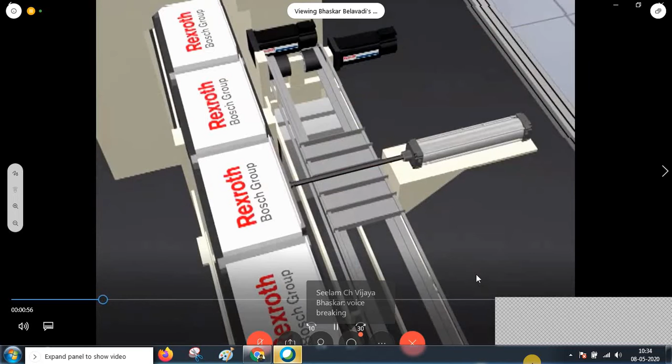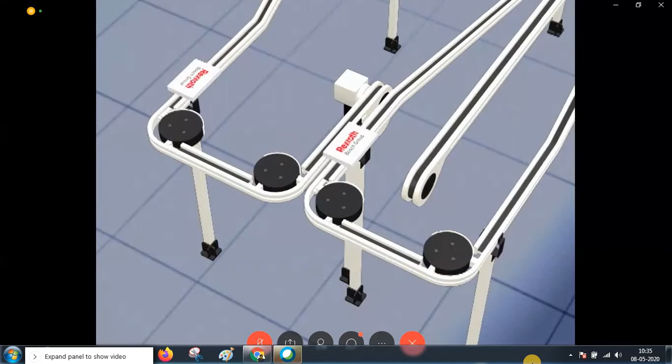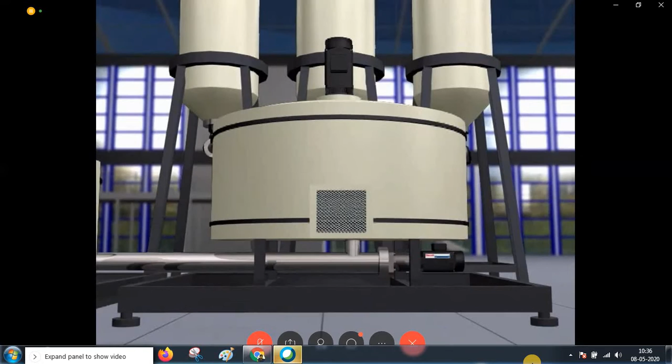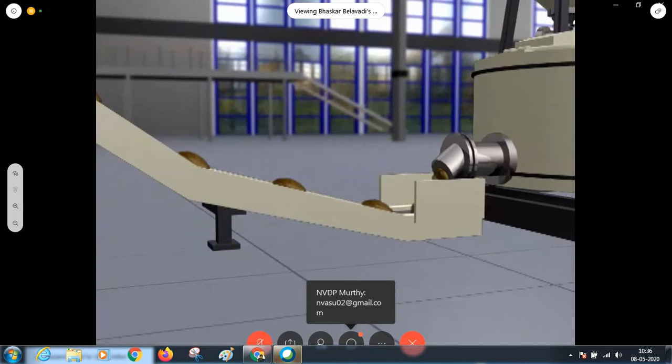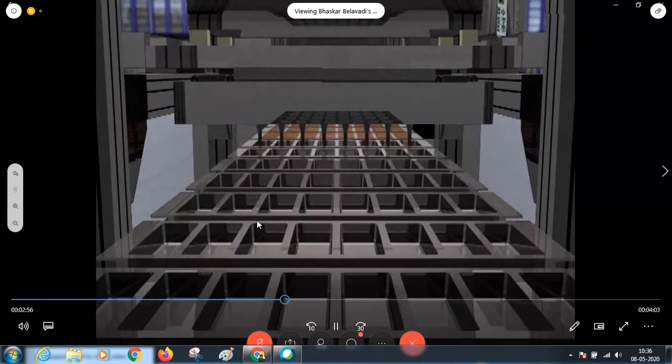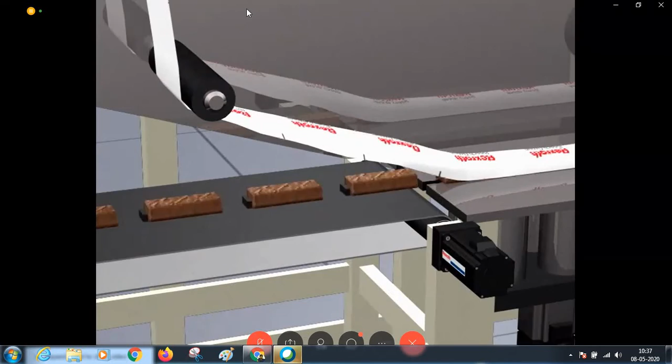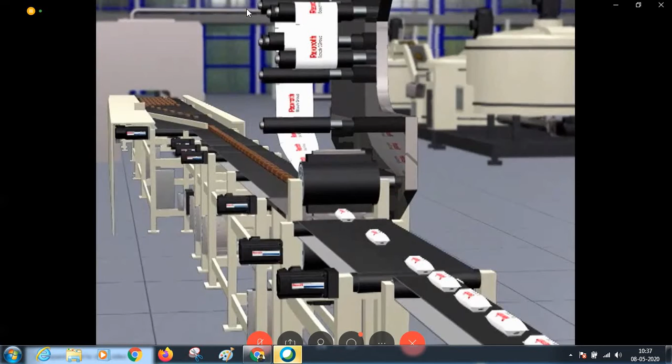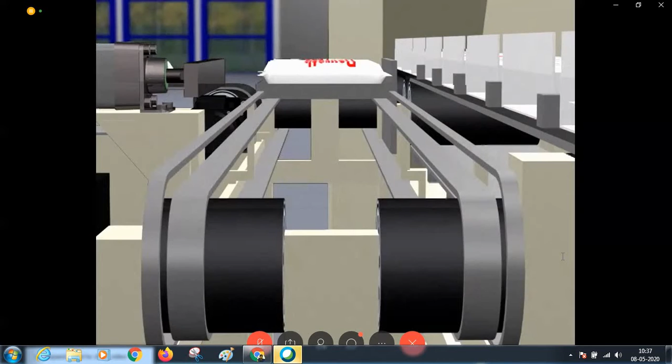Innovative automation concepts with digital servo drives, corrosion-resistant pneumatic cylinders and valves, as well as hygiene-compatible linear modules, ensure high-precision chocolate molding. All conveyor tasks related to the packaging process are mastered perfectly by the modular Rexroth chain conveyor system, suitable for both horizontal and vertical product transport.

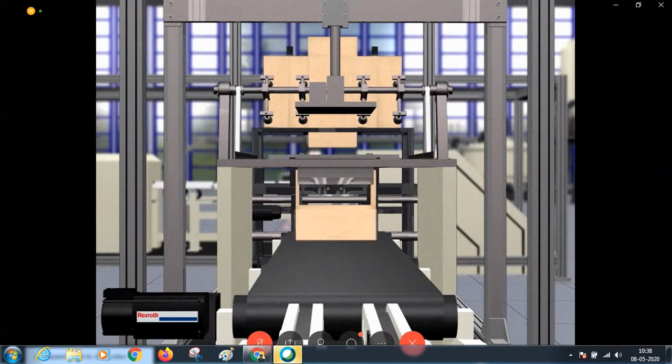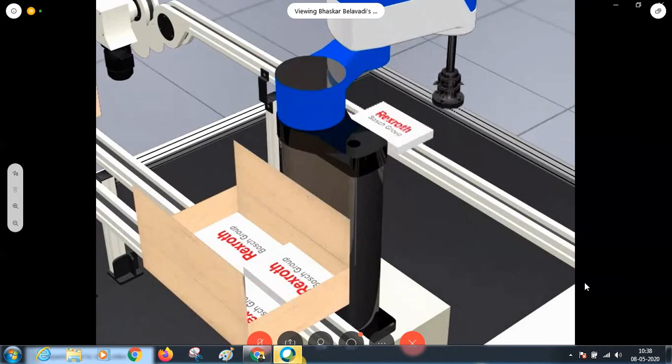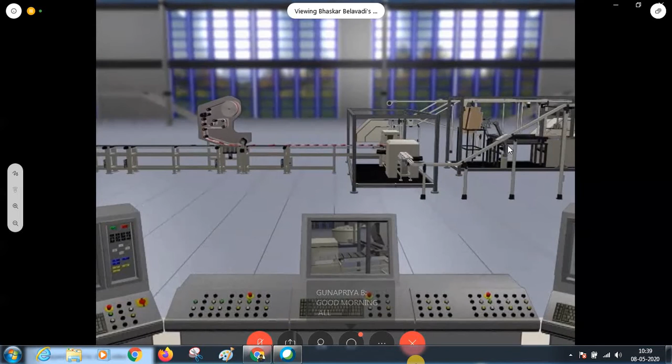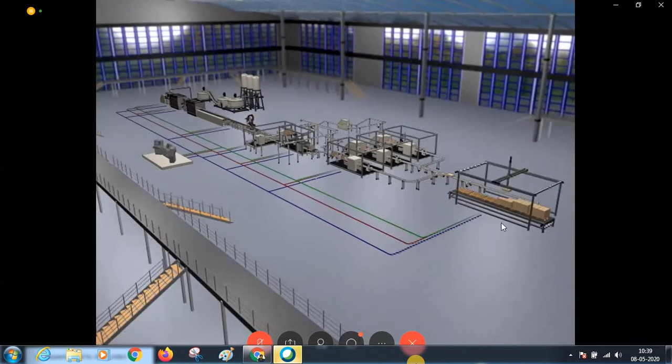While pneumatic grippers make sure that the blanks of cartons are handled carefully, the intelligent servo drive technology and ready-to-install linear motion systems erect the cartons. Networking the systems using Ethernet provides you with central access to all production technology relevant data. Rexroth, competence in total line automation. Now, I can enjoy the chocolate.

Okay, that was a small video, about 6 to 8 minutes, on automation. It was basically concentrating on the chocolate manufacturing and packaging industry. So I think you got some feel about how industries deal with automation, and why automation is really required in industries.

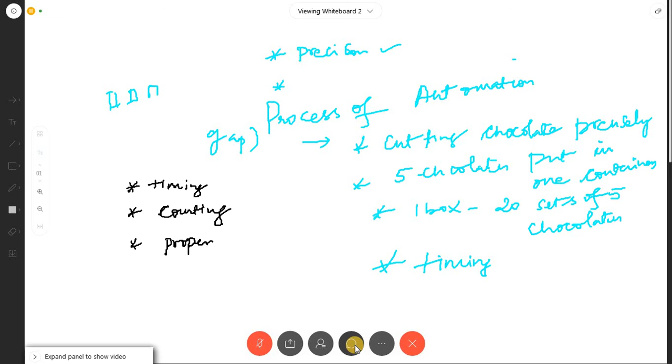So in a simple way, I can just say you would be interested in timing, you would be interested in counting, and you would be interested in keeping all these things intact, like a proper control of the entire process. So all these things we are basically supposed to do in the process of automating any production unit.

So now the thing is getting to know what an automation involves. Timing is required, counting is required. The entire process needs to be controlled in the right way. So a lot of logic is involved in doing all these things. So having said all these things, now I think we need to get into the actual automation.

Now we need to get into the actual automation, where we will understand how automation is really achieved. So to get to know how the industries were operating earlier, I would like to show you one more small presentation where you will get to know how it was earlier and how it is now.

Are you guys able to see this?

So now the concept of PLC has come into the picture. The PLC is basically a kind of computer, I can say, which controls industrial machines and processes. And PLCs are applied in different areas of industry, like material handling, packaging, palletizing, milling, boring, grinding, filling, sorting. You take any kind of operation that happens in industry, everywhere this PLC is used.

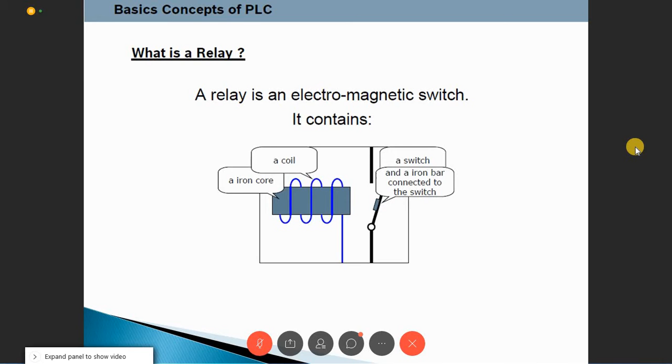With logical relays. Now, what is a relay? A relay is basically a combination of a coil and a contact. All of us know how it works. Now, what you can observe on this side, the one shaded in blue, is basically the relay, where you have a coil and a switch. When the coil gets energized, the switch closes and the current will flow. That is how a simple electromagnetic switch or relay works.

So this is depicting how a relay works. Whenever a coil gets energized, a magnetic field is produced, and the contact will be pulled towards it. You can see that the contact makes, and the current will flow in the contact as well. So the entire PLC, the programmable logic controller, is based on this concept of relay. What a PLC involves is basically relays, nothing else. And it is just a simple I/O box.

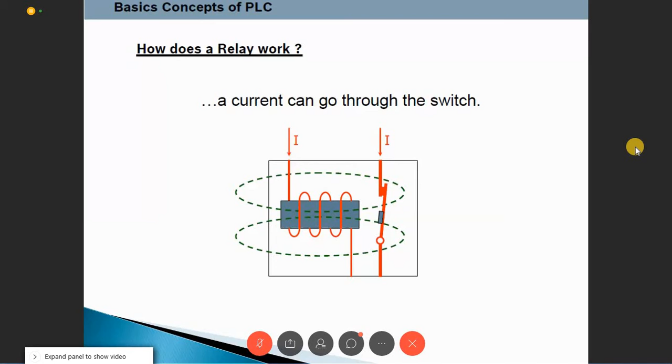So between the input and output, what it has got is a number of switches in it. Okay. So I think this much is enough for us to understand what is a programmable logic controller. So in simple words, to make you understand what is a PLC, I can just say it is just a small box which contains logical relays. You do not have a physical relay, and that makes a difference.

So when I say there are thousands and thousands of physical relays, if at all anything goes wrong in between, maintaining them becomes a difficulty. So in case of PLC, what we have is all kinds of logical relays. You physically don't see a relay, but you say that there is a relay inside it. And lakhs of relays we are able to realize using a programmable logic controller.

The name itself says it. The controller is basically logical in nature, and you write a program to control basically the entire operations, whatever happens. So that is basically a PLC. So I hope you got this point of what is PLC. Any question at this point? Any question about what is a PLC and that kind of stuff?

Okay, good. Thank you. So having said that, now we'll get into the multisim part. Now that basic knowledge of PLC is required because in multisim we will be doing something called a ladder program. And ladder programming is the kind of programming that we use to build the logics for PLC.

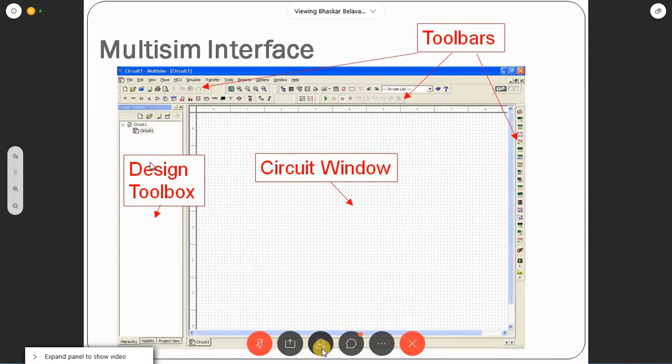And these things are kind of known to all of us. You can all the time understand what these are, just to give you a feel of what are there. And this is most important thing, the component toolbar is right here, which will give you things like basic components, different kinds of ICs and all, which you will get to know shortly. And that is where basically all the components, few basic components are available.

And these are the two buttons which are used to run and stop the simulation. And this is also kind of instrument toolbar where you can find function generators. This is on to the right side. So if you see the multisim screen to the right side, you can see all these things where you can find multimeter, function generator, and other things.

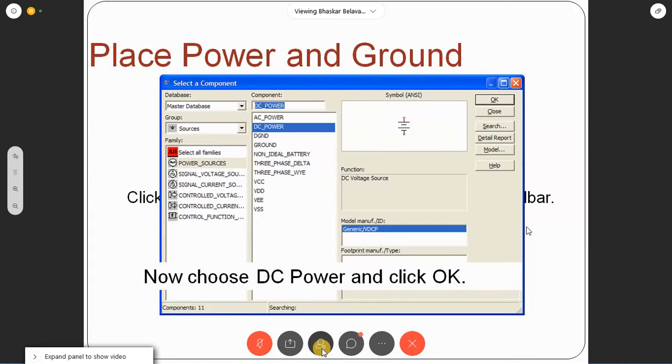So these few things anyway we will do it. I just wanted to show you quickly as to what this entire window looks like and what they are. Okay, so what we'll do is quickly simulate one circuit, one simple circuit. My idea here is not to do many things on the circuit part, but to do something on the ladder programming part. So I will be using one or two simple circuits to show how basically multisim can be used for simulating any kind of circuit. Okay, so this is multisim.

Let's say I want to simulate a small circuit, let's say a simple voltage divider network. So what will you do? You will go to place basics. If you can see the component toolbar right here, you can go to place basics, and what and all are required to do a simple circuit of voltage divider. Probably we may require 2 to 3 resistors. Let me try to simulate a small circuit now.

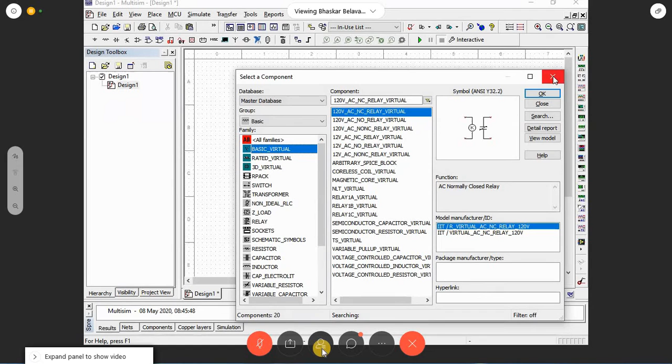I'm really not worried about the kind of output that I get, but I just want to get all of you a feel of how to use multisim for rigging up circuits. Now this is a very simple circuit what we are doing. So once all these 3 resistors are placed, probably I can take one more resistor to have output across that. So let's say one more 1K. So I have placed 4 1K resistors. I hope all of you have done the same thing. You can use any resistor, any component of your choice, but I have placed 4 resistors right here.

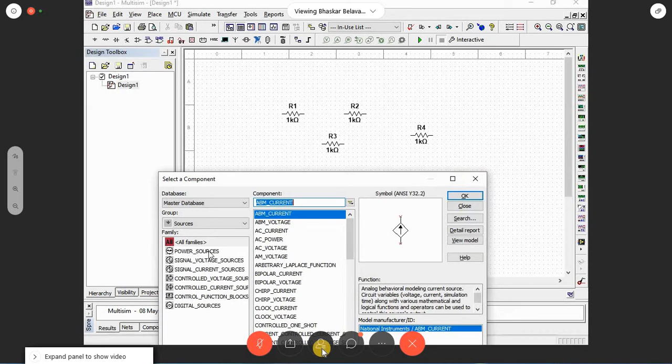So once that is done, you can think of using a supply. Let's say I'm going to use a DC supply. Where do you see DC supply? If you go to sources, you will be able to see under power sources DC power. I'll place the DC power supply. You would be interested in having the ground as well there. I'll use the ground. Anything else required? As of now, I think these are more than enough for me.

So I'm going to arrange all these things in the right way. So I'll say 1K resistor there, one more resistor here, one more resistor somewhere in the middle. So if you want to rotate that, you can right click on that and it will give you rotate clockwise or anti-clockwise. You can do whatever you want. Just right click on the component, you'll be able to do whatever you want. And one more thing, right.

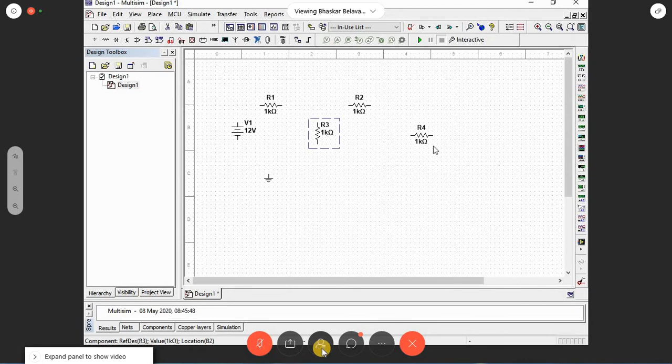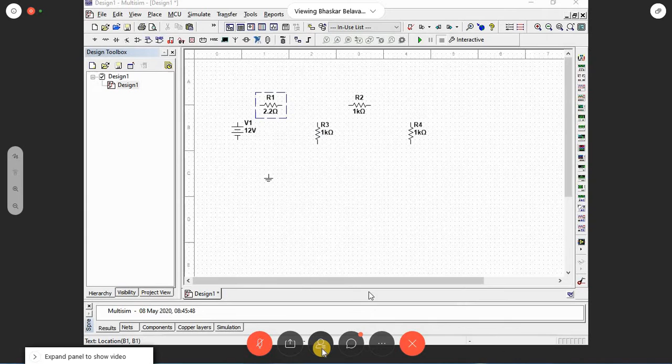Now if you want to alter the values of these resistors, you can double click on the value, double click on the individual value, and you will be able to make the changes for that. So let's say I want this resistance as 2.2K. And just let the system... I'll have this resistance as 5K. Let this be 10K resistance. So any value of your choice.

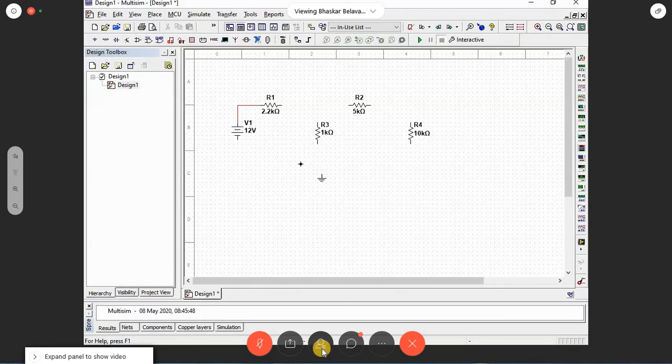Now you need to do the connection, so you need to interconnect all these things. I'll start from the supply side. I'll just click on the tip of the particular component. The moment I click on the tip, or if I bring my cursor towards the tip, it will show me the wiring connection. You can just drag it and drop that particular wiring wherever you want. And likewise, go to the other side, click on that edge or tip, and connect the ground. And likewise, do all the other connections. I hope all of you are able to do it.

So we are done with the connection part. A simple resistive circuit is rigged up now. Now I would be interested in measuring the input voltage as well as output voltage. So what I can do, we can go to the right side. The right side of the window, you can see many components or equipment placed, and I will choose multimeter out of it.

So the very first component or equipment you see is a multimeter there. So I'll take a multimeter, click on that and place it here. Here you can measure current, voltage, resistance, and power as well in dB. So I'll be interested in measuring the voltage.

So I'll connect the positive to this point and negative to the other side. So I'm done with it. If you want to measure the input as well, you can do it, but right now we may not require it because I know the voltage is already 12 volts. So I may not require a multimeter at the input side.

Now we can run this simple simulation. To run it, we're going to use this play button. This is there exactly above the circuit. So in the last row of the toolbar, you can see a run button, or I can press F5. Both will run the program.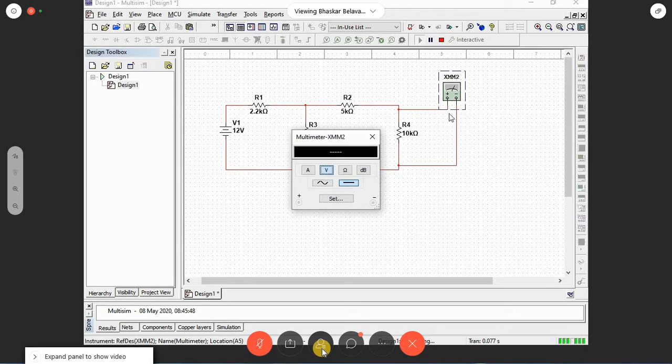To run it, double click on the multimeter to see what is the voltage that drops across the 10K resistor. So this is the voltage that it gets: 2.39 volts. This is the voltage you are getting.

So this is how we basically do the simulation part, and the same circuit can also be taken to LabVIEW as well. Probably this is not the right platform to understand all those things because we need to move ahead to the ladder programming part. So I think this bit of introduction is enough for all of us to understand how we can rig up circuits using Multisim.

And you can find all different components. You can stop this and try to discover the different components that are there in Multisim. Almost 17,000 different components are available in Multisim, and you can design your own component as well. So if you want a particular transistor of a specific configuration, that is also possible with Multisim. So a lot of things could be done. It's very user friendly and versatile. Anything could be done with this Multisim.

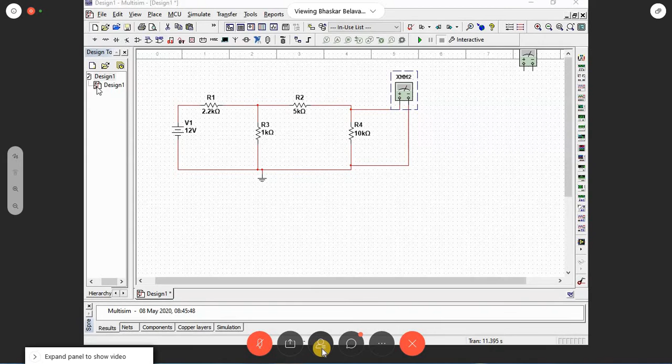So having said that, now what we can do is we'll quickly try to get into the ladder part of it, the ladder diagram part. So again, I would like to share the whiteboard before we start inserting the ladder or writing the ladder logic here. So what I can do is create one more design, a new design, and keep it empty for the time being, so that once we complete understanding how and what is ladder diagram and how to write it, we can come back here and start inserting all those things we learned into the coming discussion.

I'm sharing the whiteboard now. I'll just try to explain a few basic things about ladder diagram, and then we should come back.

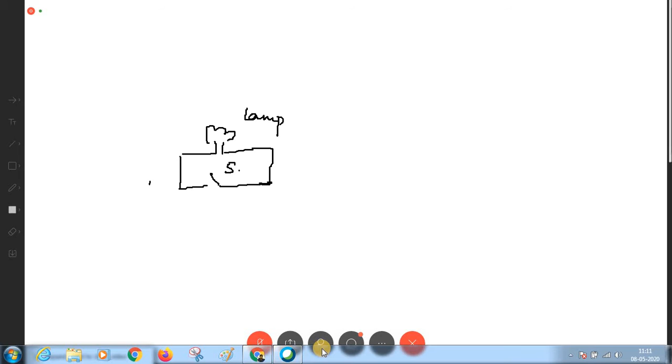So before I explain what is ladder logic and all these things, I would like to take one example here. Let's say I have a small job to be done. There is a lamp, let's say, that has to go on. The moment I put on the switch - let's say I have a switch S, this is a lamp - a small job needs to be done: the moment I turn on the switch, the lamp should glow. That is the job. So for understanding, this diagram is fine.

But when you try to write this as an electrical circuit, how will you write it? How is that you are going to write it? So you would obviously require a supply, because without a supply, even if you have a switch, the lamp will not glow even if the switch is placed. So let's say we are going to have a supply of 24 volts, and there is a point behind taking this 24 volts, which I'll tell you shortly. And then you have a switch, then you have the lamp.

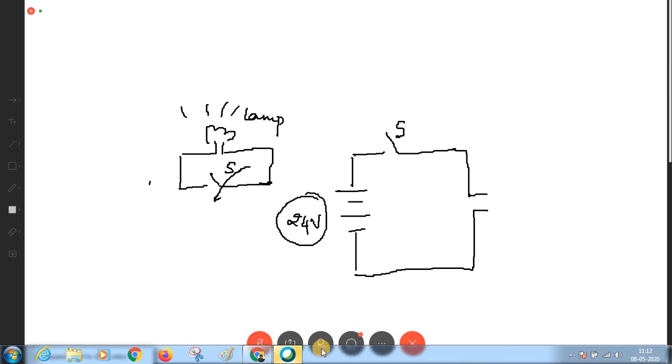Let's say this is a lamp, and that's an output for it. So what you are doing is giving an input and expecting an output from the circuit. These two things you are doing. Input is given by the switch, even though you have a supply, which you will understand now. This becomes an electrical diagram.

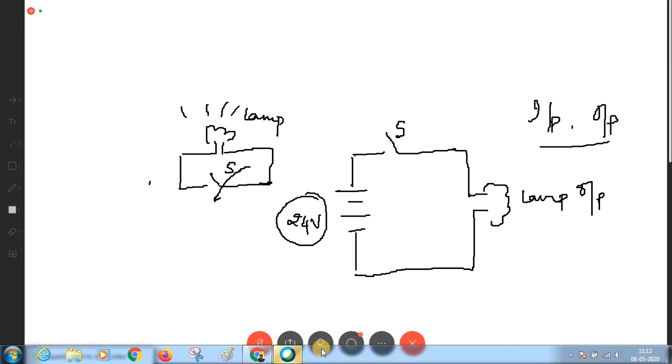Now in this same example, if you want to implement it using a ladder diagram or ladder program, you need to understand a few terminologies used in ladder programming, and you'll understand why we call it a ladder program. So what you may require will be a contact.

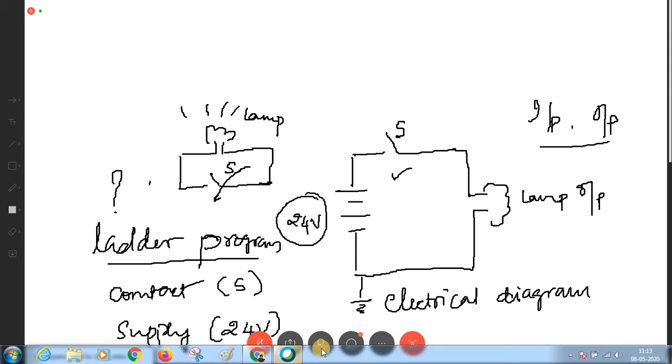That is this, which I've called S. You would require a supply of 24 volts, and any circuit will also have a ground. The supply includes 24 volts as well as 0 volts, and it requires an output, which is a lamp in other words. So in writing the ladder program, you need to identify these things.

What all are required? So in my simple job, where I want to switch on the lamp using the switch and a 24 volt supply, I would just require a single contact, a supply which is 24 volts as well as 0 volts indicating ground, and an output which is the lamp.

Now when I say contact, what kind of contact am I taking? Normally, under normal circumstances, the position or status of the switch is open. Until you operate on it, the status is open, which you call a normally open contact, NO. So if there's a switch which is normally open, there should also be one which is normally closed.

A normally open contact is normally indicated like this. This is a normally open contact. How do you indicate a normally closed contact? A normally closed contact is indicated like this. This is how a normally closed contact is indicated.

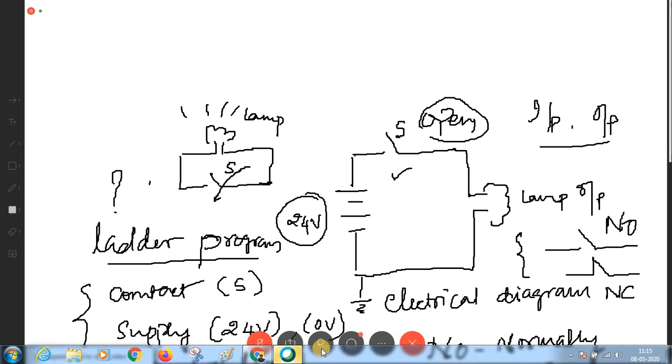And a normally closed contact is indicated like this. This is a normally closed contact. I hope till here things are clear.

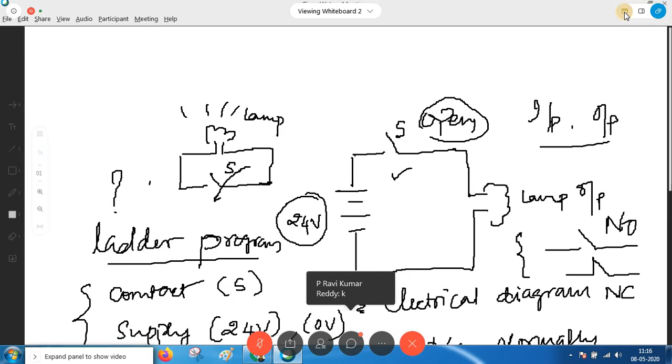Now we are actually getting into the groove of multisim with automation. Before this, this was agreed upon. Initially we had discussed the PLC part. Probably most of you may not be clear with that, but once I start doing the ladder programming, you'll get a feel of PLC as well as automation. So not to worry, but right now just try to understand what is done here.

These are the important things you'd require in understanding the automation process, as far as usage of PLC in industries is concerned. So let's stick to these two notations: normally open and normally closed. Further to it, you may also require an output.

An output is normally indicated as a coil in case of a ladder diagram — an output is always indicated as a coil in ladder programming. A coil is indicated either this way or like this; it's one and the same. So this is how an output is indicated.

So now we'll try to write the ladder program.

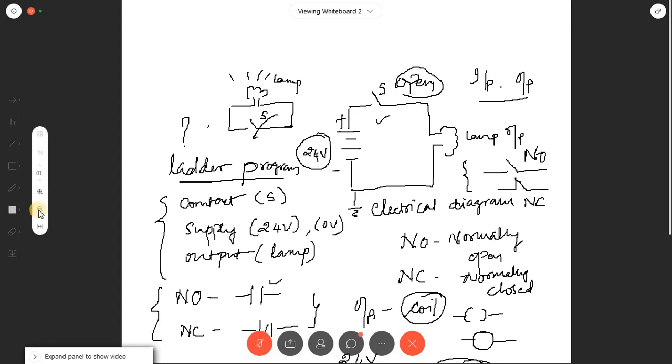It is the logic which uses this 24 volts, and based on whether it is 24 volts or 0 volts, the logic or the relays are going to operate. Once I complete this ladder program, I'll tell you where the 24 volts is utilized. Basically, 230 volts gets converted to 24 volts. So what I was saying is you will have a switch here, and a lamp.

Now, the screen is shared, madam. Are you able to see the screen? Somebody is asking to share the screen. Yes, sir. Okay.

So now I'm going to tilt this diagram that I've written 90 degrees anti-clockwise. What you will see is 24 volts on this side and 0 volts on the other side, and you will have the switch like this, S, and you will have

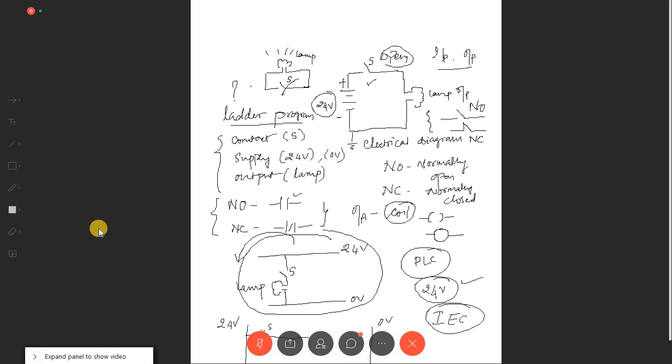From the top, sir, I cannot put it because I'm scrolling down. Sharing the screen from the top is quite difficult. I can show you the upper part and scroll down later on. Just a second.

I'm extremely sorry. I didn't know you were not able to view my screen after this NO and NC. Probably we can redo this. I'll redo whatever I wrote. I hope all of you remember what I've written here, because you may require it. So I'll erase all these things.

I'll start with the previous part. So my job was this. I'll just write only that electrical circuit.

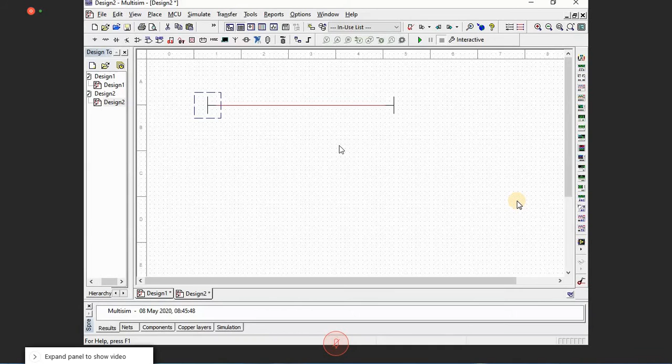Now our next job will be to place a contact as well as an output lamp. So I want to see once the contact is closed, the lamp should glow. So I am interested in placing the switch as well as either a coil or in my case a lamp. Anything will do. So I will go to Place Ladder Diagram. Just before Ladder Rung, you've got Ladder Diagram. So Place Ladder Diagram. Select that.

This window will pop out, and in that window go to Ladder Contacts. Now there are four different contacts in it. One is input contact NC, input contact NO, relay contact NC and relay contact NO. Do not choose the relay part, choose the input contact part. Now what kind of contact are we interested in? We are interested in a normally open contact. So choose a normally open contact.

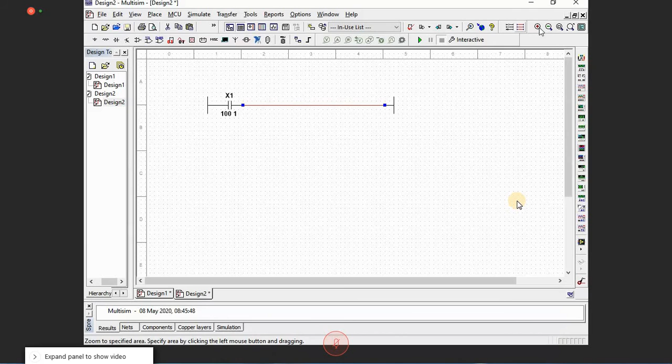And if you can see, this is exactly identical to what we wrote there. And at the same time, you would be interested in placing a lamp. So what you can do is, if you do not know where to check or find the lamp, you can just directly type lamp here, go to all groups.

Now these are the different families of groups that you have got. Sources, basics, diodes, transistors, analog, many things are there. Even the ladder diagram is also a part of the group. So you can select all groups and you can just type lamp, or you can search for indicator.

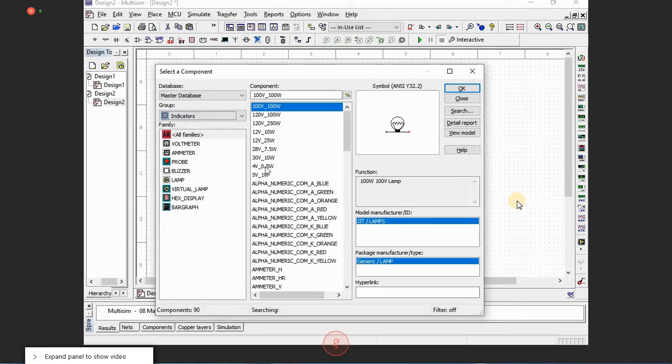Let me type it as lamp. Maybe this one. You can see indicators right here. Under all groups, you can see an indicator. So I'm going to place, let's say, 28 volts, 7.5. I'm going to place this. We are done with it.

Now we can run this. Now things are ready. This is what we wanted. Turn on the switch and the lamp should glow. We have turned on the switch. Absolutely nothing is happening. I have turned on the switch. Absolutely nothing is happening. Did I really turn on the switch? I just ran the program, but switch is still not turned on. So we need to turn on the switch.

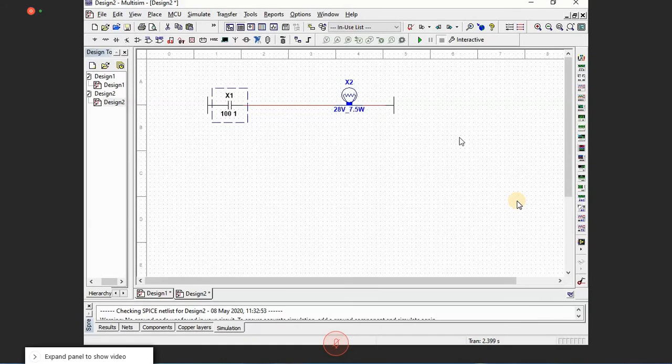So to turn on the switch, a small thing needs to be done in this Multisim. When you're provided by other PLC manufacturers, there things will be different. But in Multisim, you need to put one more thing before you run the program, and that is this. Again, go to the ladder program, place ladder diagram. There you can see ladder IO modules.

I hope all of you are able to see that. Yes, I know all of you are doing this along with me.

So go to ladder IO modules, in place ladder diagram, go to ladder IO modules, and you can place any module of your choice. So right now we will take input module 24 volts, and if you can observe here, there are so many modules, and 24 is also mentioned, because as we are doing simulation, you can use any volts and try to simulate it. But all standard PLC manufacturers will always take 24 volts. So choose a 24 volts and place it here.

Now if you can observe something, there's X1, below X1 something is written, 100 space 1. That indicates that you require an input module, and the identifier of this is same as identifier of this. 100 for X1 is same as 100 for U1. It indicates there is a reference. There is a reference designated for U1 as well as this switch.

So you should be using an input module to input a value to the switch. Otherwise, this switch is not going to work. It is as good as a dummy switch. So this switch will be operated only when you apply something to this particular input module. Now in this X1, the number is 101, indicating that U1 has got 8 different input pins, and in that you are going to apply to the very first IN1 a high signal to operate this switch. Did you get my point?

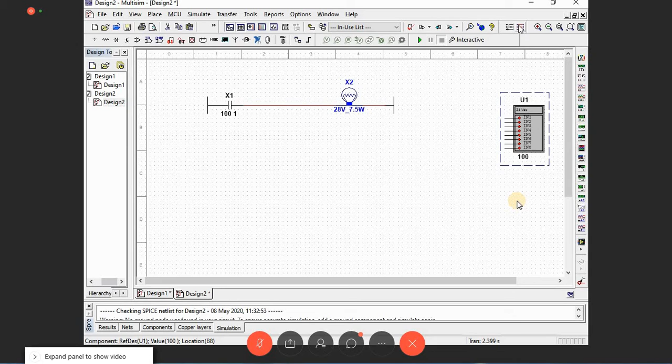100 1 for X1 is indicating that 100 is basically pointing to the input module, and 1 is indicating the pin of that particular input module. So you should be applying a high to this so that you operate this switch. So what you can do now is you can place directly 24 volts, or you can do it like this, which I will show. I'll be showing it like this.

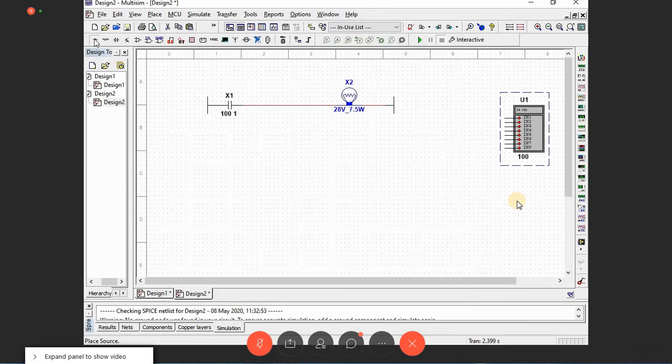So what I'll do is I'll try to place, let me take it from here. I'll be placing a source of, let us say, a DC power supply. And I will also require a ground. Now you know where these are available. I'll leave it to you to please search all these power supplies, grounds and all those things.

And I would also be interested in doing one more thing, which is push button in my case. Let's say I want a push button. We can select all families and you'll be able to see this. Select all families, all groups. You can see a normally open and a normally closed. I shall take a normally open.

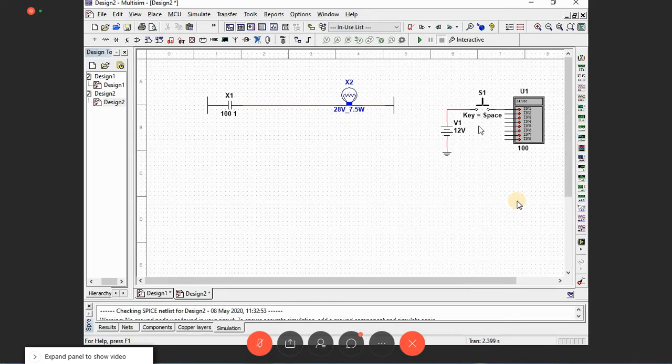I can do the connections this way. What is the difference between a switch and a push button? A push button is going to retain its state only while we keep it pressed. The moment you release it, the state will come back to its original position. So now we'll try to see whether it works or not.

I'll make this 24 volts. The supply is made 24 volts. So let's see whether it works for me or not. Are you able to see this? I'll do it again. 24 volts. Let me replace this.

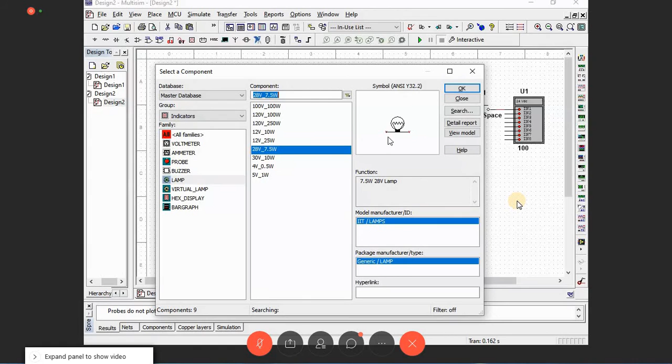Now what I can observe is this. The moment I close this push button, you're able to see the lamp glowing. The moment I release it, the lamp will also stop glowing. Now we are able to see the operation that is happening. So a switch is being controlled by this input module through a push button right here, with 24

volts applied here. Now these rungs we have inserted here will not have any supply as such in this Multisim. But when you do it in the real sense, in the real ladder programming language, you will see the vertical lines having 24 volts and 0 volts respectively. The whole concept remains the same. The only thing is, in Multisim you are going to place 24 volts. So this is how basically it works.

Now what I want to do is keep this lamp on even if I release the push button. As long as I keep S1 pressed, the lamp will be on. The moment I release this switch, the lamp goes off. I do not want this to happen. I want the lamp to be on the entire time once this switch is pressed and released.

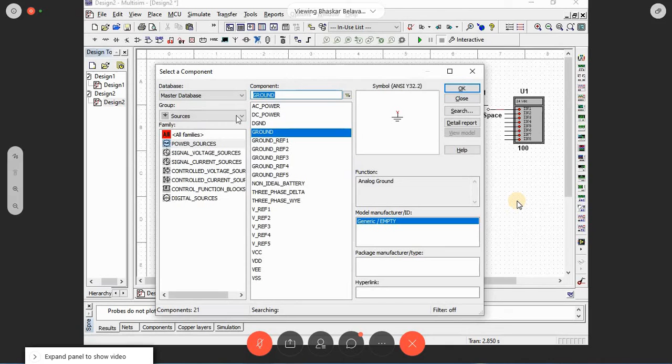Yes, this can show errors that you have done, and most of the time Multisim can auto-correct simple mistakes. Where do you get a switch? You can go to basics, or open any component. Just go straight to all groups and all families. Don't worry about anything, and use the component search toolbar.

In the component search toolbar, you can just type PB. PB stands for push button. It will show you this list. Here you are supposed to select either NC or NO. Right now we are interested in normally open, so select push button normally open.

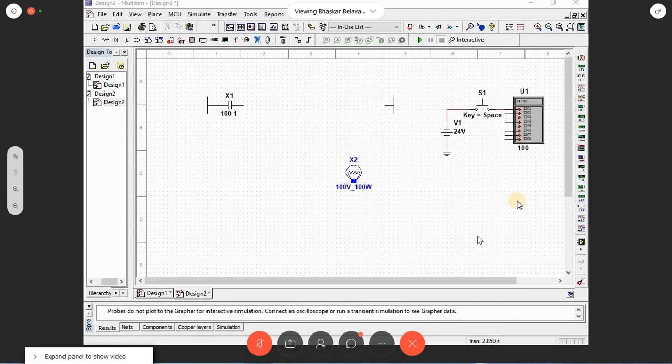I hope this is done. Shall we proceed further? And we move ahead. We're done.

So now the problem is, when I press the push button the lamp glows, but the moment I release the push button, the lamp also goes off. But I want the lamp to continue to glow no matter what happens to this push button, whether it is on or off. So how do we achieve it? To do this, we bring in the concept of relays, and that is where the actual relay concept comes into picture as far as PLCs are concerned.

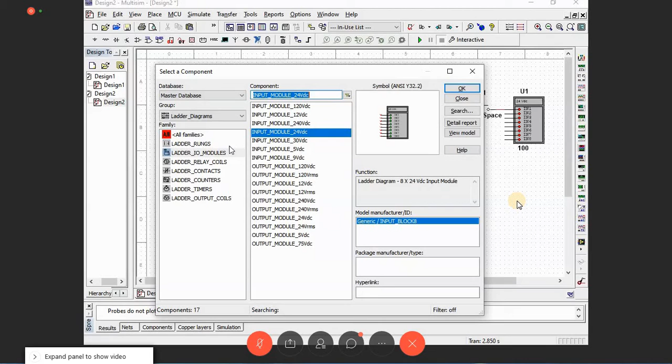A PLC is basically all logical relays. Relays play a very major role, and this is one example where you can understand the concept of relays and their importance. I'll go to this ladder diagram and go to contacts. Now you're supposed to choose relay contacts. I'll select relay contact NC or NO. I'll be choosing relay contact NO.

And I'll place it here. I'll go to the relay coils. I'll choose a relay coil as well. So please remember, we are doing two things. One is choosing the relay contact, other one is choosing the relay coil. So in ladder contacts you can see relay contact NO. In ladder relay coils you will see relay coil. So we are going to choose these two things.

I'm going to place it. Now just look at the placement of these two coils as well as the contact. I'll place the coil that I've chosen, which is M1, in the very first line, and I'll make the connections like this. I'll insert one more rung. You can also do it meanwhile. And I'll place this contact right here. I'm placing this contact, which is the relay contact, right here, and I'll place the lamp here. And make sure that the connections are made properly. Otherwise, you won't get any output.

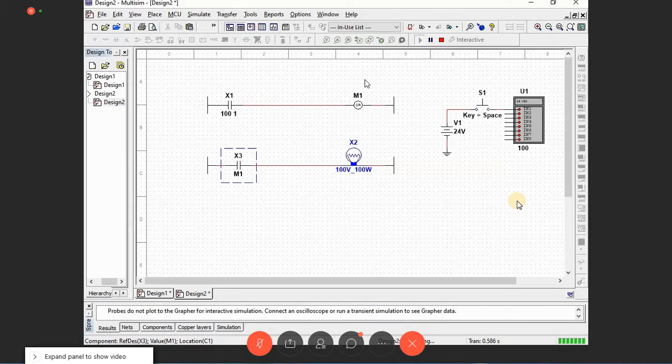If you can observe the names given to it, the relay contact is having a name M1. The coil is also having the name M1, which we call a reference designator. M1 is basically a kind of reference designator. So you can change it to whatever you want. Let's say A10. Simulator is running, I cannot make the changes. You can rename this and call it whatever you want. So yeah, you can make the changes there. So right now you have M1 and M1 here.

So this coil and contacts are put together. So a combination of this coil and contact is basically a relay. So the entire concept of relay is brought in here. But we are still not able to understand what is the importance of this relay concept or what the coil and contact are doing. Now the point was when I press the push button, we wanted the lamp to glow. So the lamp was glowing, but I want the lamp to continue to glow even when I release it.

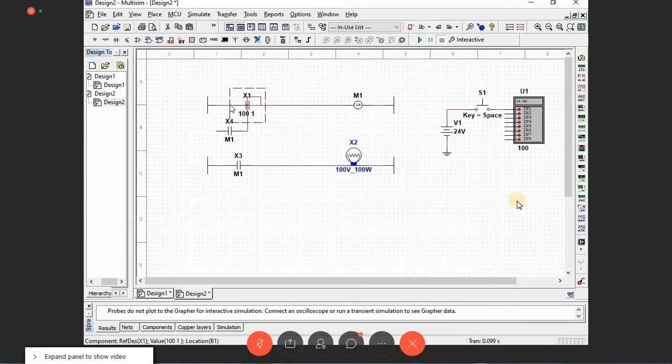So what we'll do is we'll make small further changes here and try to add one more contact, normally open, and try to place it here. So please observe what is being done here. I just brought in this contact and connected it across X1, which is 101, which is my actual switch. Now we will run this and see what is going to happen.

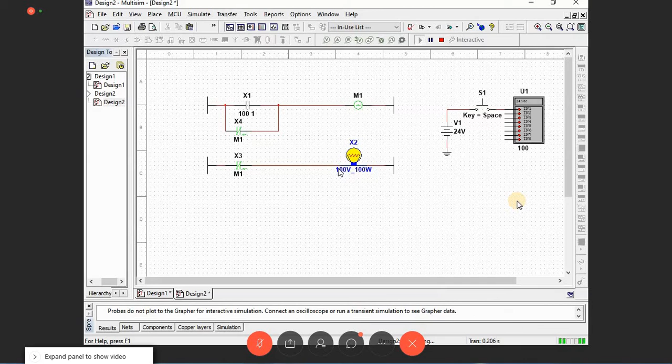Now I pressed the push button and I released it. Even after releasing, you can see the lamp glowing. Now what is the change that we got? This entire logic that I've written here is what is called the latching concept, latching logic. So we have latched the input to the output. By making a small change in the logic, I'm able to see the lamp glowing even without this push button being pressed. I pressed it and released it. The lamp continues to glow forever until I stop the simulation. Now this is basically what is called the latching concept.

Now this latching concept is the most important concept that we use in automation technology. So whatever we do in automation using ladder programming, all the time we go for this latching, because everywhere we basically use push buttons and we try to do many things using these push buttons, which are actually inputs. So got the point?

Now is anybody having a question as to how this entire logic is working? Good. No questions. Thank you. Okay, do you want me to repeat this once?

Okay, so what was happening earlier? Let me remove this switch for the time being. So what was happening earlier? When I pressed the push button, IN1 was giving a signal to X1, and X1 would get closed.

The moment X1 closes, 24 volts will flow to M1, which is a coil, and that gets energized. There is a coil contact relevant to M1, which is X3. So once coil M1 gets energized, the contact will also close, because a normally open becomes a closed contact now, since the coil got energized. So the moment this contact closes, the lamp will switch on.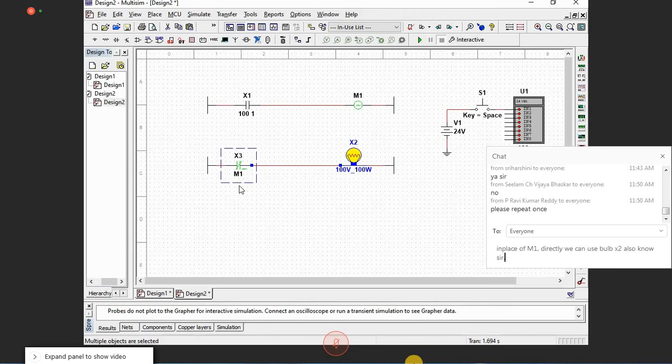So this was happening when you had kept the push button in the pressed or closed position. But we wanted the lamp to continue to glow even when it is released. So in that case, what we did was provide a separate path.

From the input side, once 24 volts gets applied to this line, this contact connected across X1 will provide a separate path for M1 to remain energized, and that M1 coil will keep the M1 contact energized, making the lamp continue to glow. This is what we actually did.

I'll bring in that new contact and place it here. I'll connect it with this. Now the moment I press it, you can see X1 as well as X4 both go green.

When both are going green, the moment I release this push button - I'm still keeping the push button in the on condition - X1 will go off, but X4 continues to be green. You can observe that X1 became black, but X4 is still in the green condition, which means it is still in the high state.

And who gave that high state? This M1 coil gave the high state. As M1 got energized, it tries to close all the contacts relevant to that coil. There are two contacts we are using relevant to this coil, and that made the lamp go high.

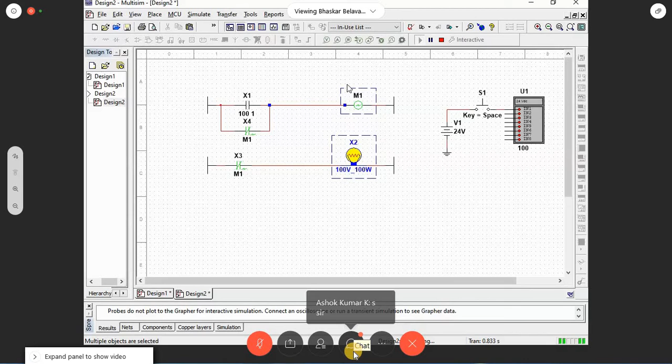Thank you. So after having said this, we can slightly move ahead and try to understand how we can switch this off. Now I want to switch this off - how do I do it? I don't have any means to switch it off.

Now the lamp got on, but I want to switch it off. The only control I had was this S1 push button. Now regardless of what I do with this, nothing is happening - I'm not able to see anything happening. And I want to improve this logic. I want to insert something with which I'm able to switch this lamp off.

So what I can do is bring in one more contact there - let's say a normally closed one this time. Just observe the logic behind this. I'm placing a normally closed now. I'll try to have this number. Now if you want to change this number, you have got this contact as 101.

Let's say I'm going to give the input to this particular switch from IN2. So what you can do is double click on this and write it as 102. And I'll use the same components, or I can directly take this 24 volt from here and use a push button.

Let me place that here, calling it S2. I'll take the same 24 volts and give this to IN2 now. Why IN2? Because X5 is going to operate based on what you apply to IN2.

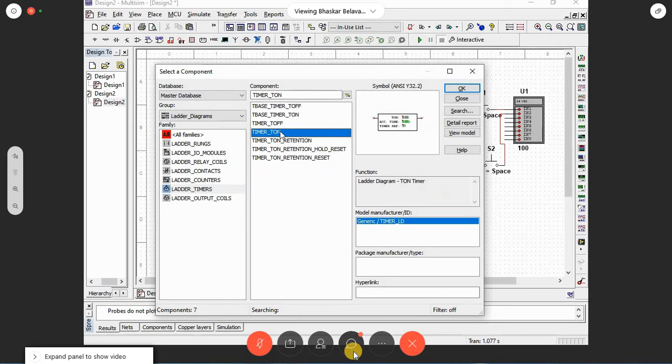Now what is our idea? Our idea is to switch on the lamp after, let's say, 10 seconds. Please remember, what we are doing here is a very simple logic, but the same concept can be applied elsewhere. Whenever you want to do any kind of automation process, the same concept can be extended to any kind of complicated program.

So I have inserted something here - you can observe I've inserted something called a T-on timer. I'll double click on that. I hope all of you know how to insert this on timer - you go to ladder diagram, then to timers, and you will see the on timer there. Just click on that and place it here.

Because my interest is to now turn on the lamp after 10 seconds, you will see how it happens. When you double click on the timer, you can see two things: one is the timer reference, which you can change at any time, and the other is the amount of delay you want.

So I just said after 10 seconds, but as I cannot wait for 10 seconds, it's a waste of time. Let me change it to 1 millisecond. So what will you do? You will write it as 1 millisecond and say OK.

Now what is the on timer going to do? On timer means that if a high signal is given to the input side, the timer will start ticking. Once it starts ticking, it will go on till whatever delay time you have given. So the timer keeps ticking till 1 millisecond - the moment 1 millisecond is completed, the output goes high on the timer.

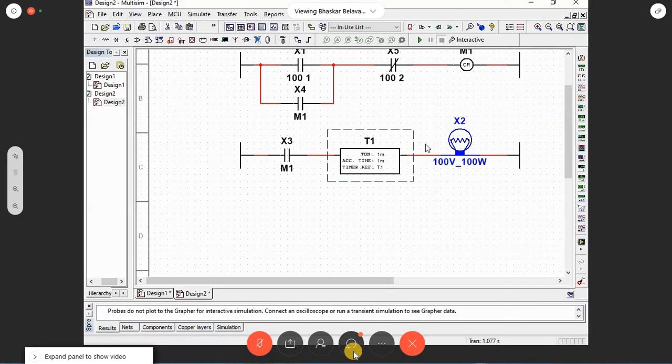Okay, so we will understand this on timer. If you want, I can just have it in a separate run and understand what will happen. So probably we can do that - what I will do is try to have it in a separate run. I'll place this timer here.

I'll try to have a contact - I'll try to use the same contact, the same X1. Okay, I'm using the same X1. So the moment I operate this push button here, the moment I try to operate...

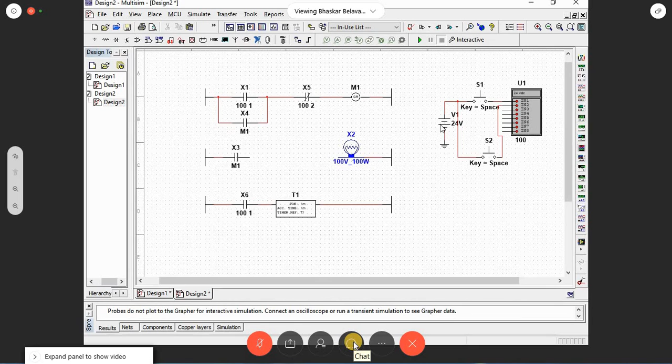Okay, so now what I've done is I've just tried to simulate only this timer part. I'll run this quickly and see what will happen to the timer, so just see what happens.

I'm pressing this first push button, this one. Observe what is happening to timer T1. You can see the timer ticking there. I'll enlarge this so that you can observe. Please observe this timer T1, or you can do it on your system.

Once it becomes 1 millisecond, you can see it's going green, which means the output went high. The moment I release the push button, I'm going to release it now. See what will happen to the status of the timer.

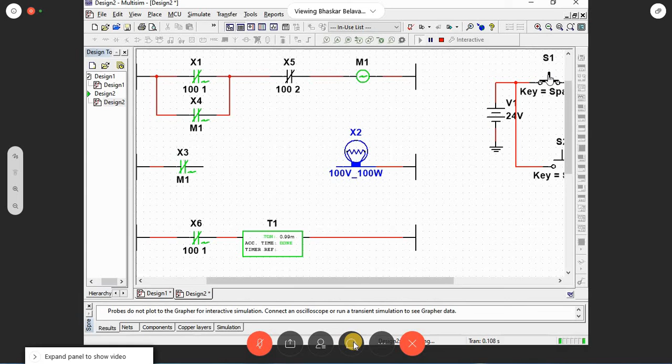Timer got reset. So the condition for this particular timer is you should keep the input always in the high state. Until the input given to this timer is in the high state, the timer will either tick or retain its state, in the sense once the elapsed time and the preset time become the same, the timer will be in the high state. The moment you disable the input, the timer will also get reset.

So what you can do now is insert this particular timer and see whether you are able to switch on the lamp after 1 millisecond or not. Let me reduce the time to 1 millisecond.

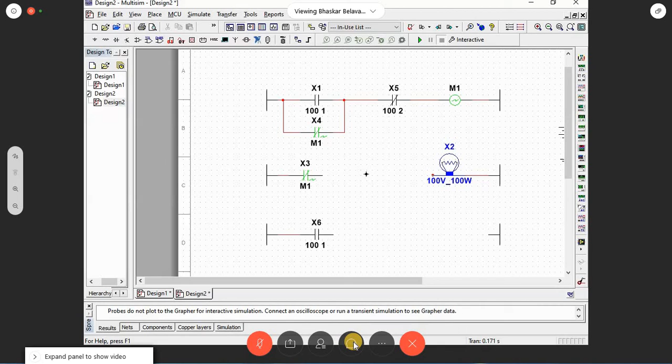Let me delete all these. So we will run this now. What should happen is, once I press this S1 push button and release it, the timer should start ticking after 1 millisecond and the lamp should glow. Let's see whether it happens or not.

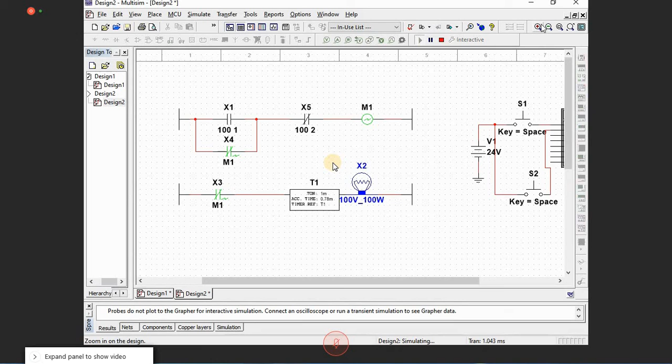I have pressed it. Timer has started ticking now. All of you can see that as well. Did the output go high? You can actually copy it.

And connect the output to that, connect the output to that, taking this, taking that, and bring it to the next step. Inserting one more rung here. Inserting one more rung. Change this.

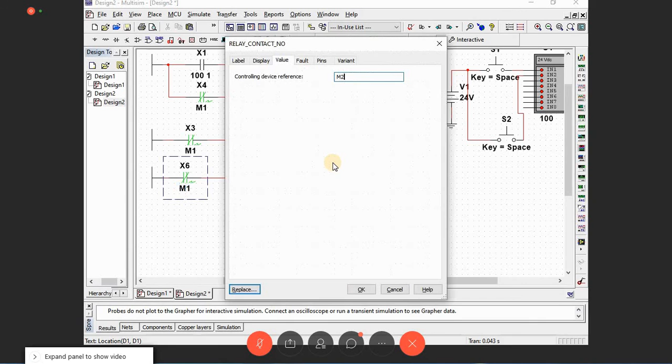Let's see whether it works out. It should work.

The whole logic is like this. So when you try to place a timer, the output of the timer will make the coil go high, and the contact will get closed, and the lamp should go on after 1 millisecond. This thing should work, I do not know what is the problem in between. So this is how basically things are going to work.

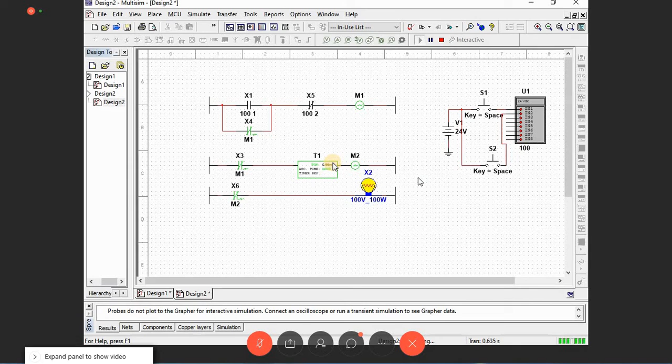There are too many things to really do here. 1 hour or 1.5 hours is really not enough for us to cover all these, and we should have a separate session to understand from the PLC part how we can do all these things. I've tried to give you a feel of the whole automation and how Multisim can be used to develop the ladder programming. Even though I'm not able to do much in this 1.5 hours, I think I've done a little bit, and I hope you guys have got some input.